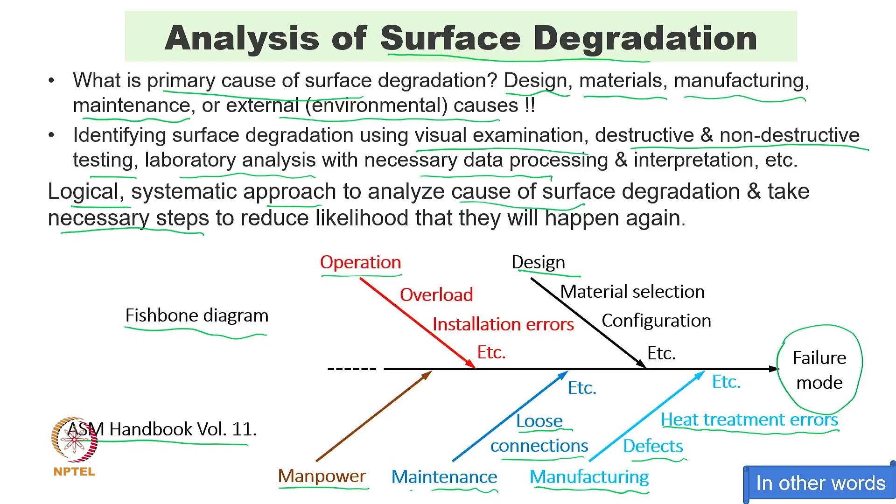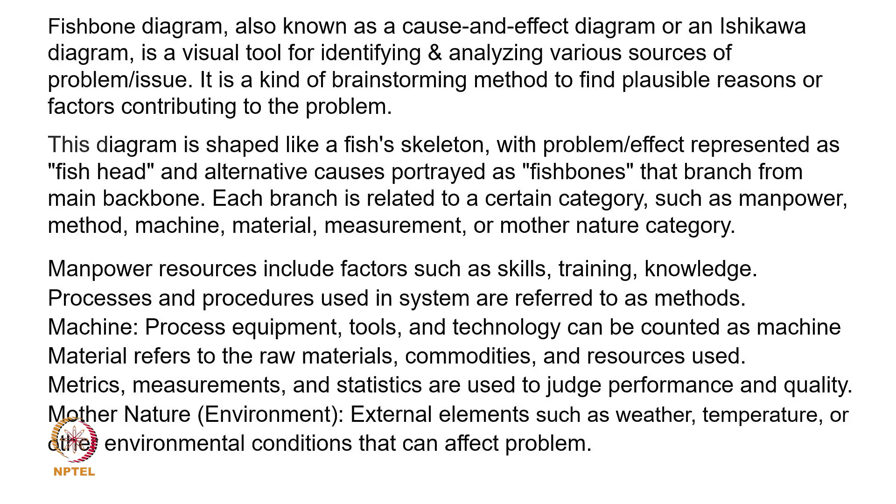Now, if I try to explain the fishbone diagram in my words, the fishbone diagram, sometimes we call it a cause and effect diagram, sometimes we say Ishikawa diagram, is basically a visual tool for identifying and analyzing the various sources of problems and issues. It is a kind of brainstorming method. We start thinking in a liberal way about what the possibilities are. So, I can say it is a kind of brainstorming method to find plausible reasons and factors contributing to the problem.

Now, why the name fishbone comes is that this diagram is shaped like a fish skeleton, with the problem and effect represented at the fish head, and various causes are the fish bones that branch from a main backbone. Each branch is related to a certain category: manpower, method, machine, material, measurement, and mother nature. Sometimes people say it is a 6M diagram. Manpower is number 1, then method, machine, material, measurement, and mother nature. That is why people sometimes say the 6M diagram.

Now, when we talk about manpower, what we intend to say is that manpower resources include factors like skills, training, and knowledge. Do we have all this? Whether a person can operate effectively, do we have some sort of automation system, or are some people well trained about those? Do we have sufficient knowledge to rectify whatever problem comes, at a micro level or maybe a very small level?

Now, the process and procedure followed in a system can be referred to as a method, that is the second M. Coming to the machine, process equipment like tools and technologies which we are using can be named as machine. Materials are things like raw materials, commodities or resources which have been utilized for the complete machine, or maybe the system, subsystem, or components, and can be named as materials.

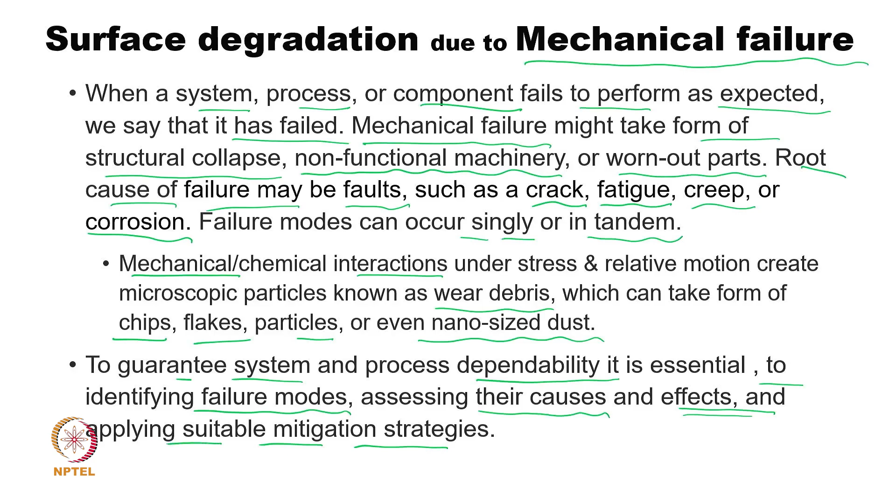However, there are a number of other methods also available which can be utilized to mitigate the failures and to brainstorm the various causes of the failure and then identify the failure. So, various techniques are available, we will be detailing those things in later lectures. But it is essential for us to understand, to have a complete knowledge.

For that purpose, this kind of course is very important, and we need to really rigorously do all those things to save the cost, to make it overall economic or not. So, whether economic or not, or whatever I am going to suggest, we need to really take a decision on that. So, I will try to provide you sufficient knowledge so that you can take a decision, and sometimes in one situation it is favorable, in another situation it may not be favorable. If we have the knowledge, we can take those important decisions.

Now, let us take a couple of examples. I am just taking the first example from my lab. We have a gear setup where there is a dynamometer to load the gearbox, a motor to drive the gearbox, and there is a small gearbox over here which is a single stage spur gear, and the details of the spur gears are given here. We have a pinion with 27 teeth, a gear with 53 teeth, and the pressure angle is the same, 20 degrees.

We have kept a lower hardness of 30 plus minus 2. Of course, we can keep 60 to reduce the wear, but we want to see the wear. The applied torque is 40 Newton meter, and we operated this setup for 198 hours to see what is really happening here. Now, if I see the overall operation, in this case it is a gear operation.

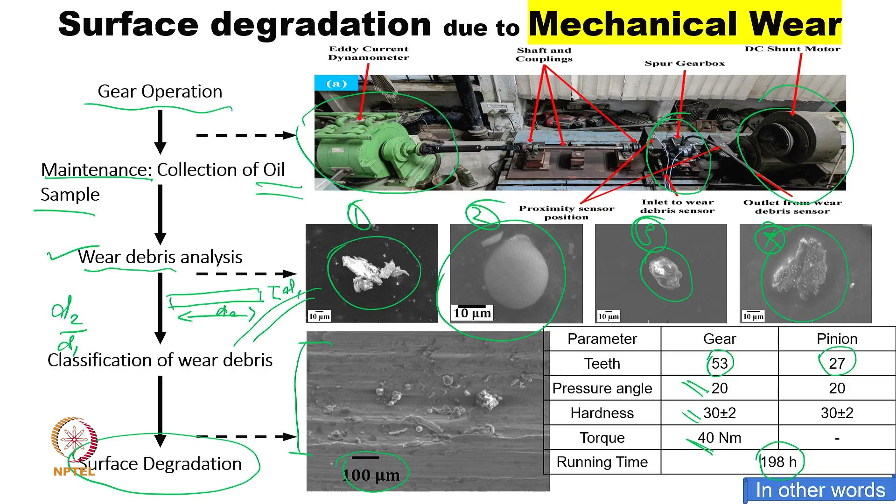Now, depending on the concentration of debris, we can decide what kind of failure is going to dominate, which will be the main cause of the failure. So, if I try to express it in other words, what we have explained is something like

wear debris. When you collect the wear debris, you need to do image analysis of the particles which are coming out of the surface, and what is the relation of the particle removed from the surface with the wear surface, and how it will affect the gearbox performance.

Maybe in a short span, when the wear starts, it may not be visible, it may not be noticeable by some other method, but this debris analysis may reveal those kinds of faults. We can take immediate actions on that.

Another thing is that to investigate the surface degradation of gears, it is important to define the complete tribological system. A tribological system is something like when we have gears, we may have bearings also, we may have seals also. So, the complete tribological system is important to define.

Then we need to figure out the oil sample and the frequency, how many times we will be sampling the oil in 24 hours or maybe 10 hours or 5 hours. That depends on the concentration of the wear debris which we are getting at that point.

Another one is that once we get the wear debris, we filter it out and remove the oil from the wear debris, and then we can go ahead with microscopy or spectroscopy or an elemental analysis. Then we can judge what kind of wear debris particles we are getting, what kind of failures will be there, what kind of remedies can be there. So, these are all interconnected.

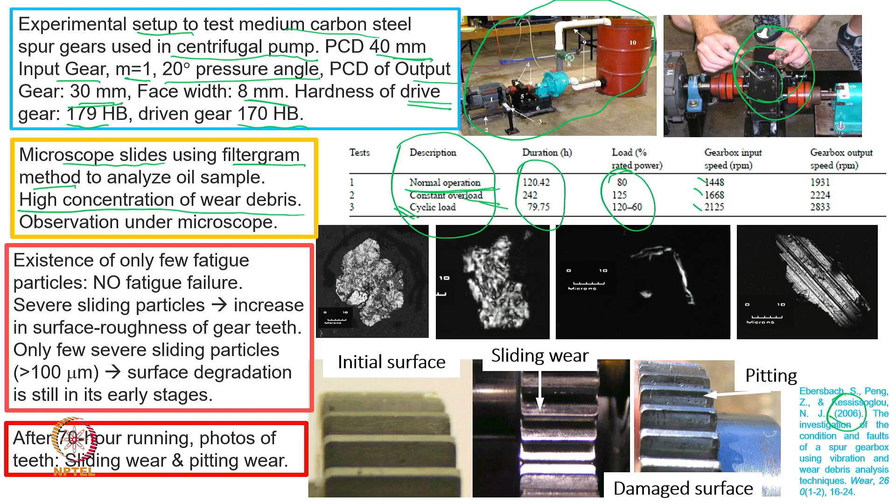Now, they found a very high concentration of wear debris, which indicated that when they are trying to accelerate the load condition and the speed condition, they are finding a lot of particles, a high concentration of wear particles. Now, they observe under the microscope, again this is a microscope, we have not gone to the SEM. So, smaller particles we are not talking about, we are talking about bigger particles.

You can see the big particle, one here, a particle here. However, there are small particles also here, and then there is another big particle. So, the big particles are there, but small particles are also there. Now, from this figure, what they could conclude is that there is no existence of many fatigue particles, only few particles are having the fatigue features.

So, they concluded no fatigue failure; even with the cyclic loading they do not find fatigue failure dominating there. However, they operated this only for 70 hours. It is not that they have operated for 200 hours; what the previous slide showed is about 198 hours, while in this case they operated for 70 hours.

Another one, they found a number of particles which indicate severe sliding wear, however, they found only a few particles which are more than 100 microns. When only a few particles are more than 100 microns, that means the surface degradation is still in the earlier or initial stages. If we take these away, we can really minimize the surface degradation.

However, they did all this under the overload condition and high speed condition, and what they finally found, this is the initial surface, the photograph has been shared. They are able to see that there is a lot of sliding on the gear teeth, and we are able to see the pitting of the gear teeth also.

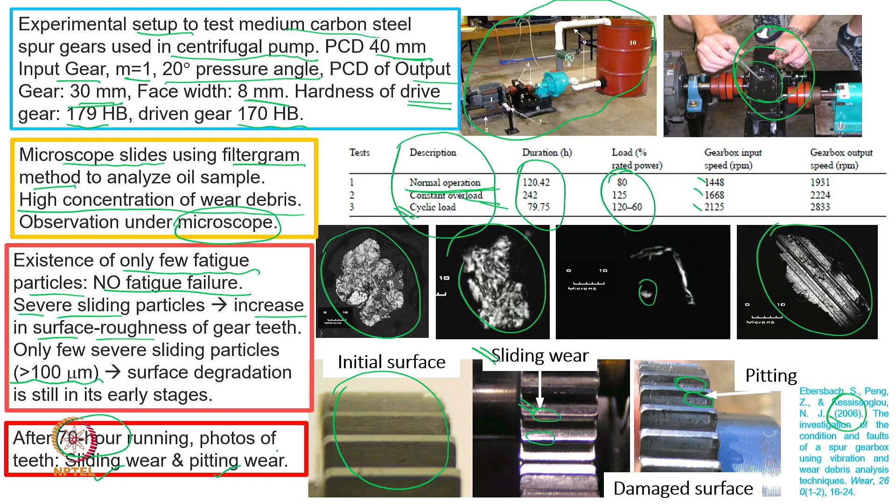Now, even though they say there is no fatigue failure, and pitting mostly happens because of fatigue failure, that means the sliding wear is causing more problems; the effective area of the gear tooth available to sustain the load is continuously decreasing, and then only the pitting will start. So, the root cause in this case turns out to be sliding wear, not pitting wear as such. That is what they concluded. Of course, they are able to observe both, but sliding wear dominates compared to pitting wear in this case.

Let us take a third example. I am just trying to provide more and more examples, so that I can give a complete understanding of surface degradation identification, how we diagnose and maybe take a judgment based on that, and what kind of new methods can be developed to do this kind of surface degradation testing. So, the third one has again been taken from a reference which was published in 2007.

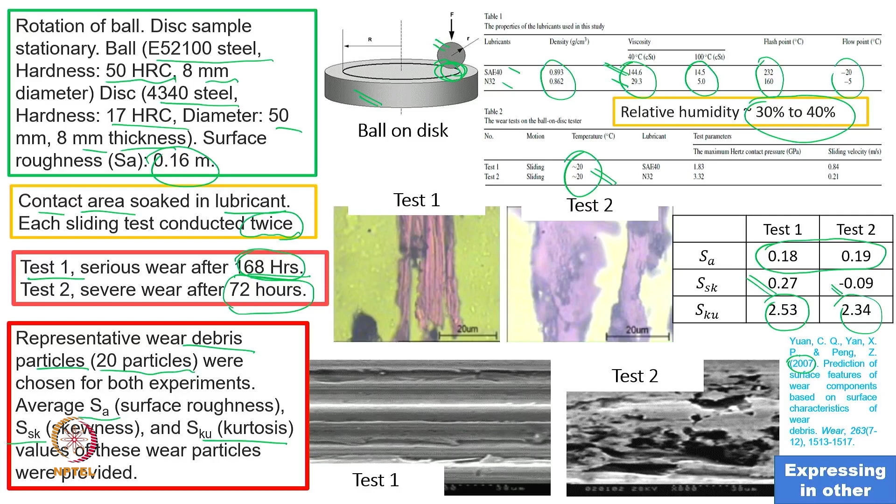When we talk about skewness and kurtosis, we need to discuss their real interpretation - why we calculate them and what results come out. We are talking about three statistical parameters: average roughness, skewness and kurtosis. We don't take only one measurement, we take many and analyze statistically. Some researchers suggest that skewness and kurtosis values are sufficient to indicate whether a machine is going to fail or not. These two parameters are related to the surface and are statistical parameters, which is why they have much more value.

We can find out skewness and kurtosis for almost all machines, even the gearbox, and that is why we can operate and find these values for the gearbox also. In normal condition and abnormal condition, we can compare and do a kind of trend analysis to come up with results.

Now what is really kurtosis? Kurtosis describes how smooth or jagged the surface is. If its value is low, the machine is operating normally, not much problem. But if the value increases, something is there - the rotating part is malfunctioning or not properly functioning. In other words, a higher value of kurtosis means there are more chances of surface peaks. If the surface peaks are increasing, the surface is getting rougher, and this is very alarming - we need to see that surface degradation has started. This is an easier way to find out and dig out information on whether the surface is degrading or not. So kurtosis plays a very important role from that point of view.

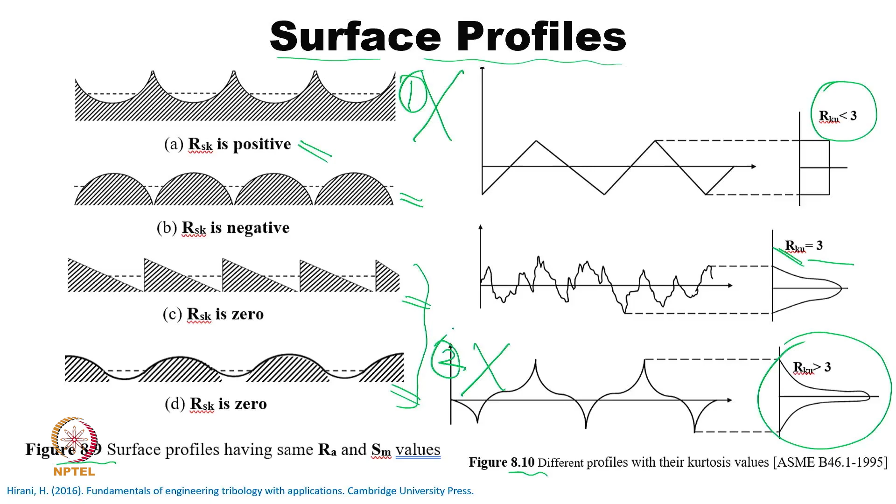If you look at this, this is more than 3, and this is what we say we do not want in this kind of surface. So either we have this surface or we have this surface, or a combination - we say this surface is something wrong, some sort of deterioration or damage of the surface is happening, and we should take appropriate measures.

Now, this is what we have mentioned about some sort of product and surface roughness feature. Now, how do we go ahead when we talk about mitigation or economic analysis, and when do we take what decision?

So for that purpose I recommend the feedback loop system, which means feedback of surface degradation and product evolution should happen simultaneously. What is the meaning of that? We say that every system, subsystem or component is meant for doing some function.

For that purpose, we require design features, material selection, manufacturing, installation, and services - it can be like maintenance services also. Now, we continuously keep checking, or follow this path, and end up finding out whether there is any surface degradation or not.

Now, if there is no surface degradation, we do not have to go to the economic side or the safety side. But if there is surface degradation, then we say the function has failed, or we have judged the function as failed. We look at the safety and then we look at the economics. If it is not failing, we should go ahead with the feedback.

Now, in the feedback, if we know the design is perfect, no problem. But if the design is perfect and the material is failing or we get some sort of signal, then we should go ahead with feedback to the system, or to manufacturing, or to installation. So at every stage we can have a feedback system. It is not that only design gets feedback - we can judge that maybe the material is wrong, then we go ahead with the feedback system.

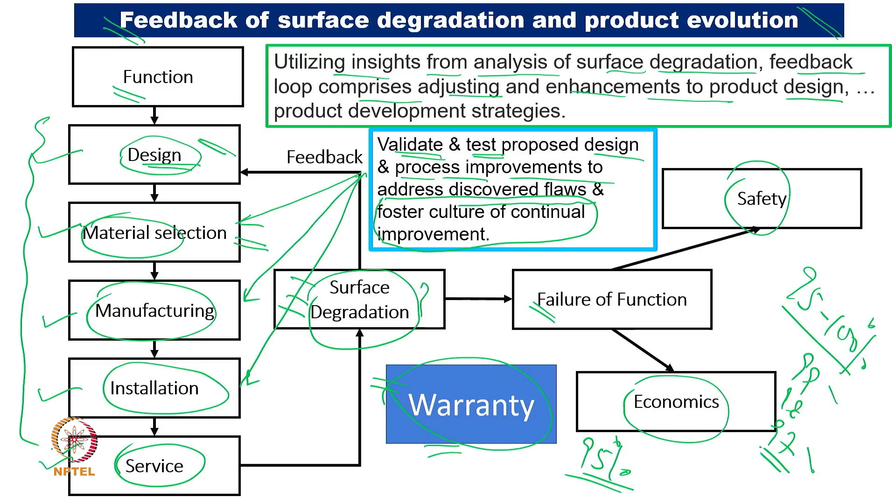Now we are coming down to the final phase of this lecture: economic analysis of controlling surface degradation. We want to control the surface degradation, but is it really advisable? Will it really give a good outcome? Yes, we should always continuously improve the surface or minimize the surface degradation. So we need to take a decision.

That's why I say that whatever surface degradation mitigation you do, there will be some sort of fund requirement. To allocate the fund, we need to take a decision, and taking a decision without complete knowledge may not be correct. So to allocate the fund to mitigate surface degradation, we should take a logical approach, and that's what I am going to present in this slide. Whatever protective measures you want to go ahead with, there will be a cost for that.

So the value of the protective measure can be given by the left hand side. Now naturally we need to find out, if I am doing this kind of protective measure, how much saving is happening. So what is the cost saving or reduced material degradation, what is really the overall value, how much saving is happening and how much the protective measure is costing me. That is where the difference comes.

If this difference is negative, we should not upgrade, or we should not take any mitigation measures. But if the saving is more than the measures which we are taking, we will take a decision. So this is one simple thumb rule.

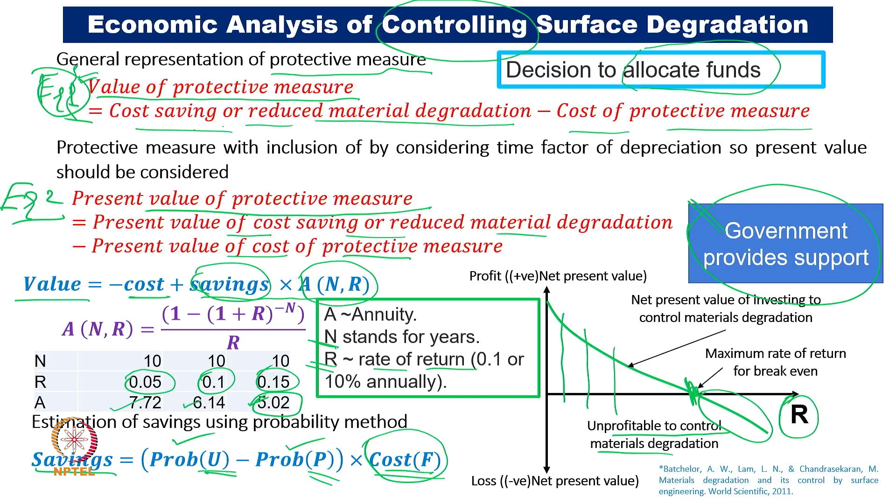Now, the question comes: I am using the word saving. What is the meaning of saving? Again, it is probabilistic. I do not know the exact value. So, we say saving can be given in terms of the probability if I do not take any measure, the probability if I take measures, and then what happens if failure happens, if the whole system fails. So, three quantities in this case: the cost of the failure, the probability of failure if we do not take any preventive measure against surface degradation, and the probability where surface degradation is accounted for and we take some mitigation measures.

So, in this slide I am using the words probabilistic analysis, because we are talking about saving and we are saying that this is probabilistic. It is not the actual number, or it is not a deterministic number. The probability of failure without preventive measures, the probability of failure with protective measures, and here cost F is the given expense of failing.

Now, just to give a complete picture, we say the expense of each failure is around 1 lakh. If I do not go ahead with the protection, the probability of failure is 0.3, and if I go ahead with all the measures, the probability of failure drops to 0.1. So, 0.3 minus 0.1 into 1 lakh, the cost of the failure. So, the overall saving will turn out to be 20,000 in this case.

Now, whether this probability is time dependent or not, in this part we are assuming it is not time dependent. So, that is where the saving comes from, and again we are using a probabilistic approach. So, it is not easy to calculate. That is why we say estimating the rate of material degradation is challenging, because there is little information available related to surface degradation, unless we have been doing a lot of work on that kind of product. That is why the feedback loop is very essential. We continuously get more and more data, so that we are able to give this kind of mathematical or probabilistic model.

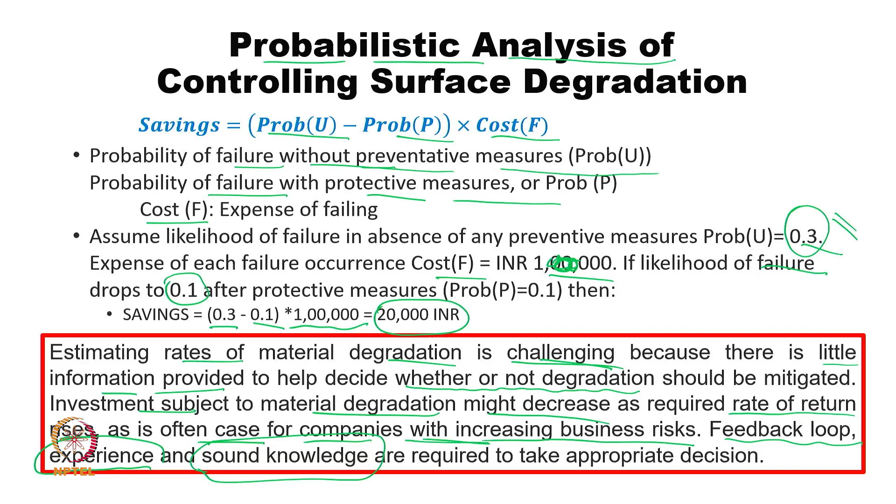Now, overall we require a feedback loop, experience and knowledge. I am trying to promote my course. I say without knowledge you can't take a decision. So, attend more and more lectures, gain more understanding, do more and more exercises to get this knowledge, so that you can take decisions in future without much problem.